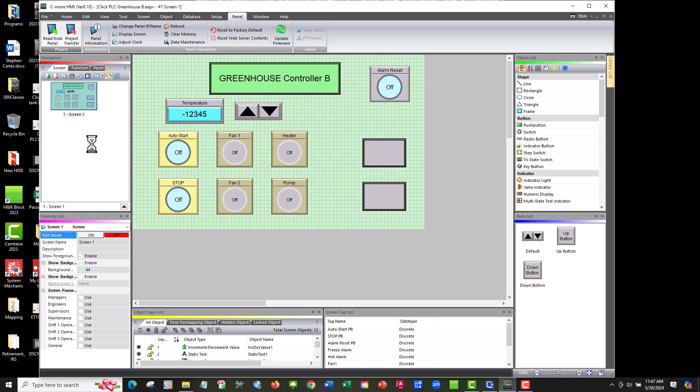Okay, first thing let's do is let's download our greenhouse controller. It's Click PLC Greenhouse B. And we're going to go ahead and project transfer. I've already connected it. And let's transfer it to our machine. Good. And let's close out of that, hide that, and let's go ahead and go to our program.

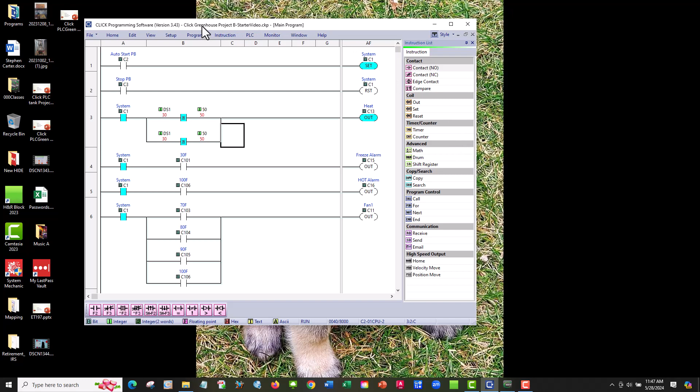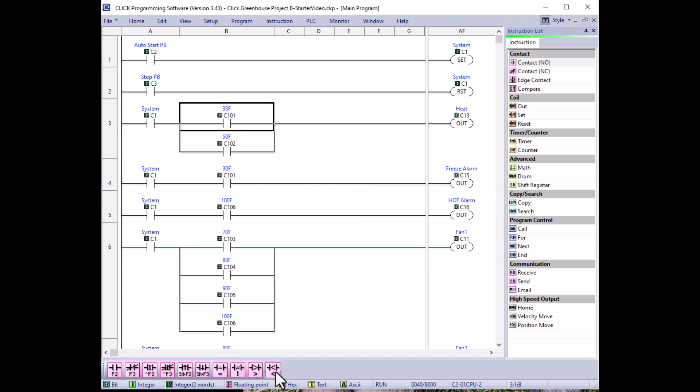And we need to open up the Greenhouse Project B-StarterVideo because I don't want to mangle my programs. Okay, we're going to modify this program. We're going to go ahead and start, and we're going to convert to analog values. So what we're going to do is we'll click on this one, cancel, and we're going to go to less than contact, and our data is going to be DS1, which is going to be from our input, and we have to use DS1 because it's an integer.

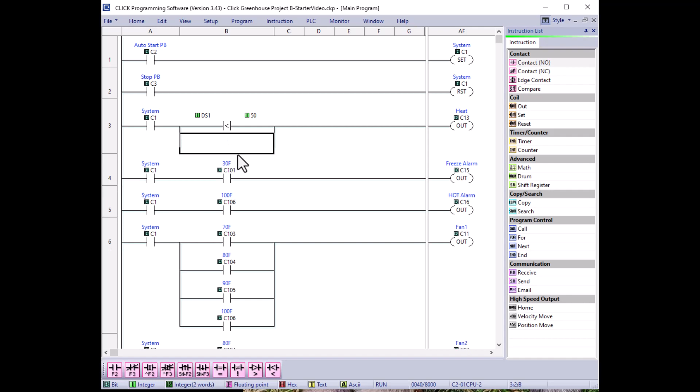And since the heat comes on under 50, we could just go ahead and just use one of these. The fan heat will come on when it's under 50, which also includes 30. So let's go ahead and do that. And let's get rid of this. And let's do a Control Shift and get rid of our connectors. Good. And let's see if we could delete a row just to make it look a little better. Good.

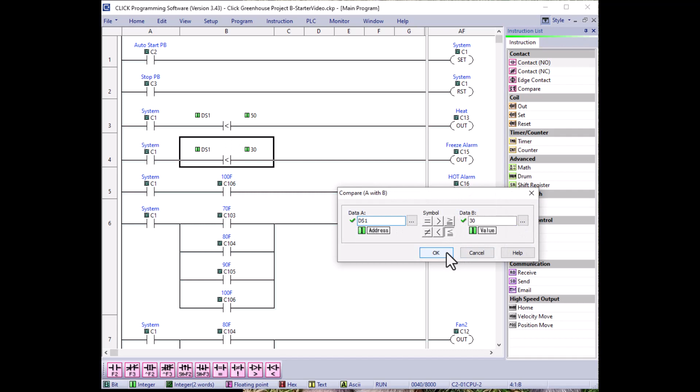All right, so our next one is our freeze alarm is going to be less than 30, so let's go to our less than, and we could find our DS1 here, and I need to go back in. Let's go ahead and do that now if I can. Nickname, nope, we'll fix that later. And we're going to use 30 here. All right, so this should be less than or equal to, what did I do? Grab the wrong one. This is also less than or equal to.

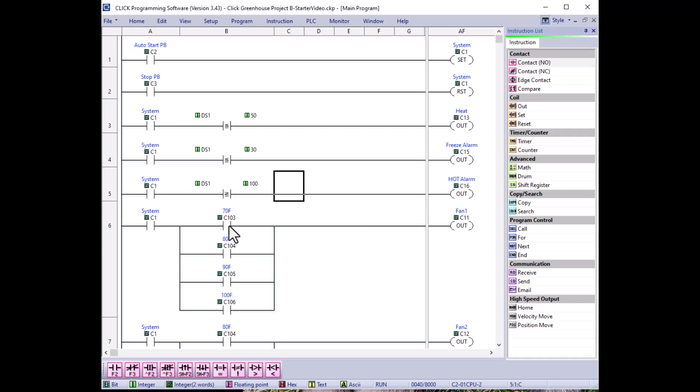Okay, and our 100 degrees is going to be greater than or equal to, also DS1, and data will be 100. Okay, and our fan is going to come on anytime it's greater than 70. So let's just go ahead and do that. Greater than equal DS1, our input temperature, and we're going to do 70.

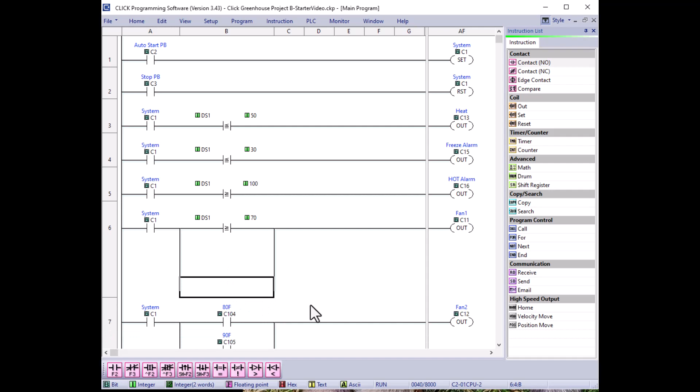Okay. So now we could get rid of our other contacts and Control Shift to erase the, and Control Shift down, Control Shift up, there we go, over, good. And let's go ahead and delete some rows to make it look better. Delete row, delete row, delete row. And our fan 2 looks like it comes on greater than 80. So let's go to greater than or equal to 80. And let's go to DS1.

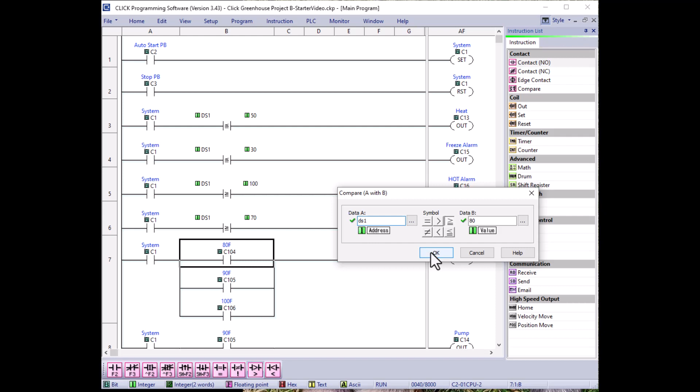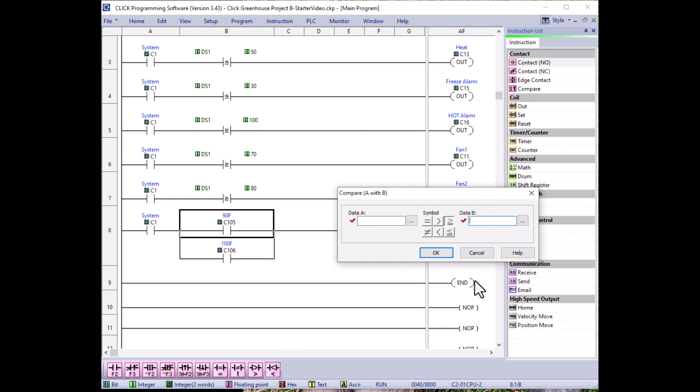Okay. And let's get rid of these two guys. And again, Control Shift up. Oops. Control Shift up, Control Shift down, Control Shift up, up. Let's delete the space, delete row, delete row. Okay, and let's see, our pump comes on, looks like greater than 90. So let's go greater than equal to 90. And let's do DS1.

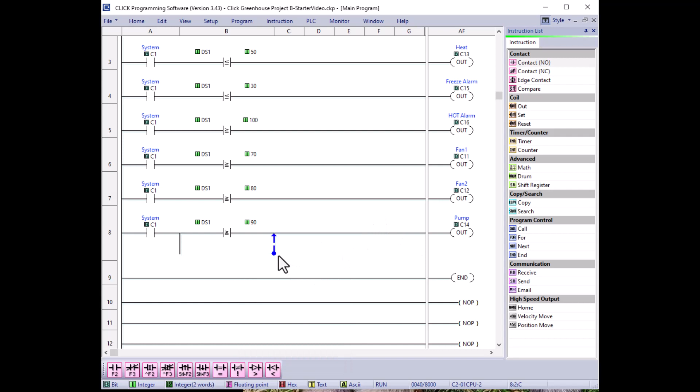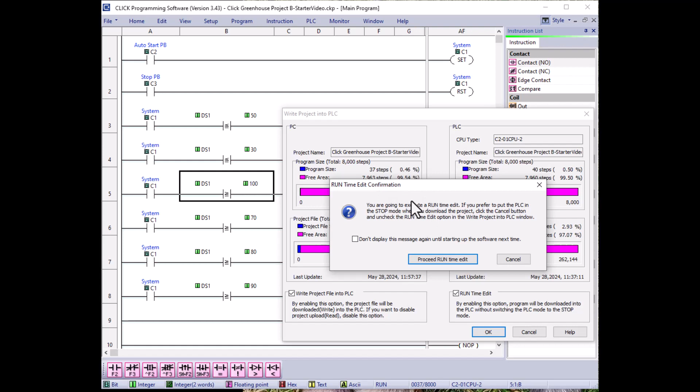And delete that. Whoops, Control Shift up. Whoops. Let's escape out of that. Okay, delete some spaces, delete. Okay, let's save it. And let's go ahead and test it here before we get too far along. Okay, so let's see, right now we have 30. And we have a problem with our freeze alarm. Oh no, we don't. Our freeze alarm should be on.

Okay, let's go ahead and clear everything here and restart everything. So now we have our heater should be on, and it is. Our freeze alarm should be on because I have it set at 30. And our hot alarm should not be on, and it is not.

And okay, so let's go up to 50. So I'm going to go ahead and type that in. We'll come back and do this here later. So I got 50 degrees in here, and we're good. Alrighty, so we got 50. Okay, so first thing we're going to do is go to 70. 70, and we could also do the increment button. Alright, so we're at 70, and we have fan 1.

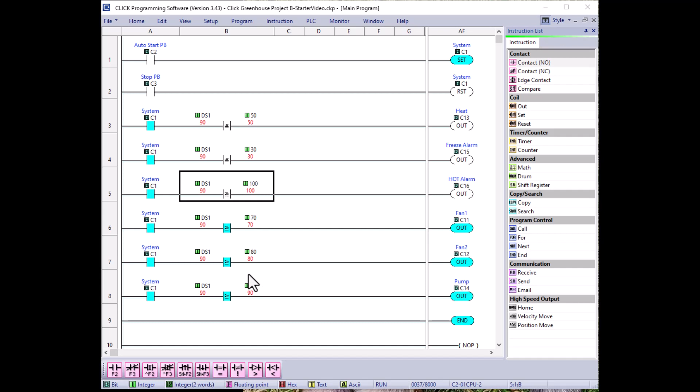So let's go to 80. And we should have fan 1 and 2 on. Good. And let's go to 90. And we should have the pump on. Good. So let's go to 100 and see if we get our alarm. Oops, 700. So we're definitely past it, but we do have our hot alarm. Good.

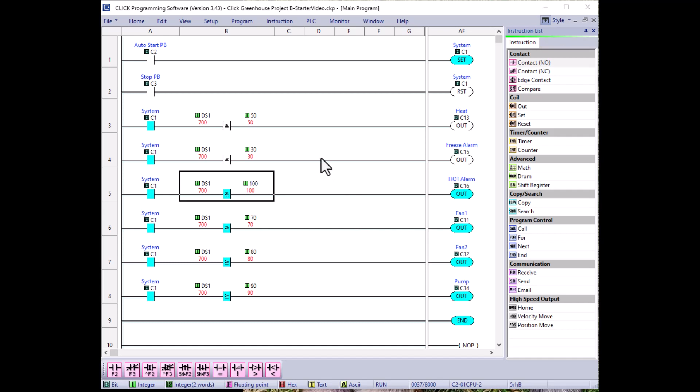First thing let's do is let's latch our alarm. So what I want to do is I'm going to go ahead and copy these and paste them down here so I could steal the parts of them. And hot alarm. Okay, so what I want to do is I'm going to clean these up. So we're going to go ahead and make a temporary, let's see if we can find a temporary one here to do. Let's do C17, and we'll come back and do that. So we're going to make him a temporary alarm, and this guy we're going to make C18.

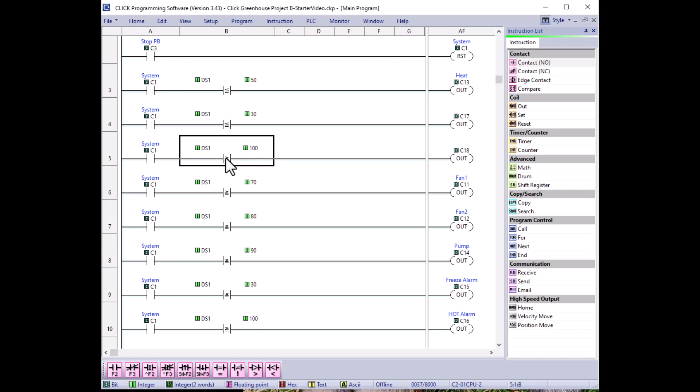Okay, and those are going to be temporary alarms. So let's go ahead and latch that. So we're going to insert a row after cursor, and we're going to put an open contact, and we're going to use, let's see, C18 on this one. And we're going to shift up, or excuse me, control up.

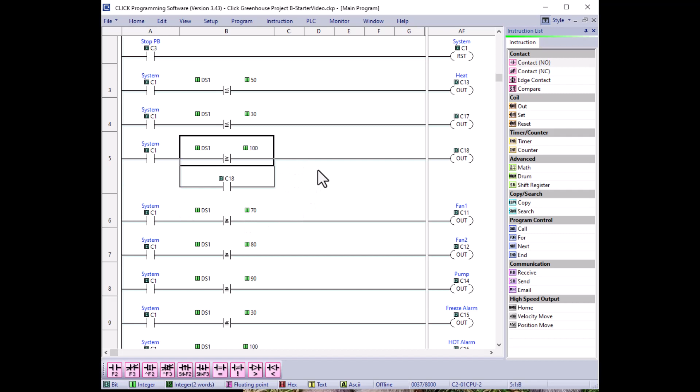All right. And let's go ahead and add what's our reset button? It should be, I think, C4. So let's go ahead and put in this and see if we can find it in our alarm reset. There we go. And we're going to make that one normally closed. So if we do our alarm reset, we should unseal that. Good.

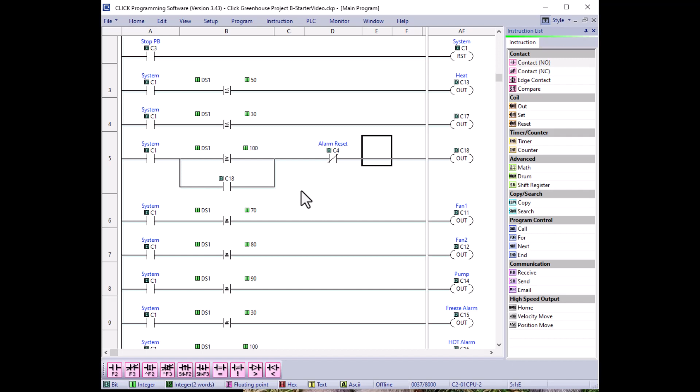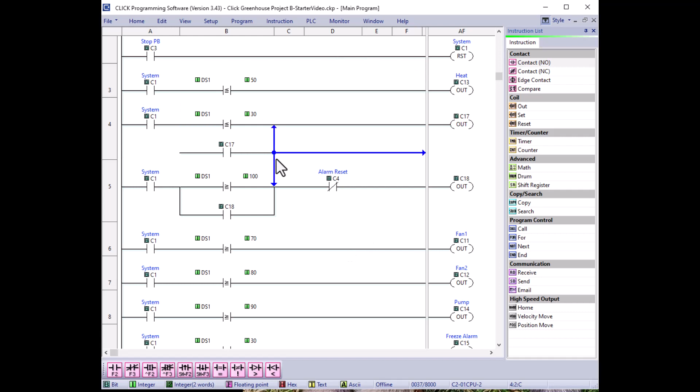And while we're here, let's go ahead and insert a row after cursor, and we're going to latch that with a C18. C17, sorry. Okay. Control up, whoops. Control up. Control up. And let's see if we can copy this guy and slide him in there.

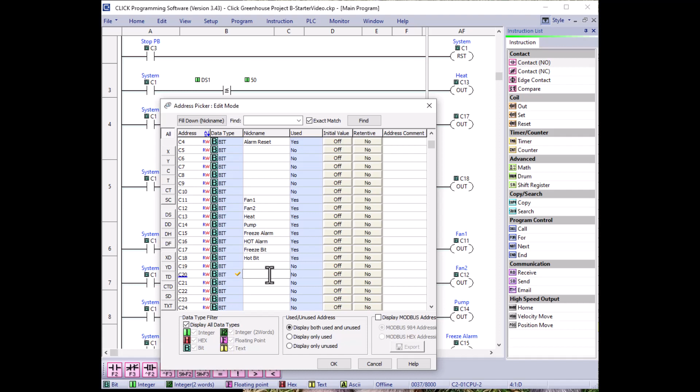Perfect. So now let's go to Program, Address Picker, and let's put some names. C17 will be freeze bit, and C18 will be a hot bit. Okay, let's go to DS1. Yep, whoops, DS1. I'm going to make him temperature, temp. Good. And alarm reset, freeze bit, hot, freeze bit. Good, good, good. Okay.

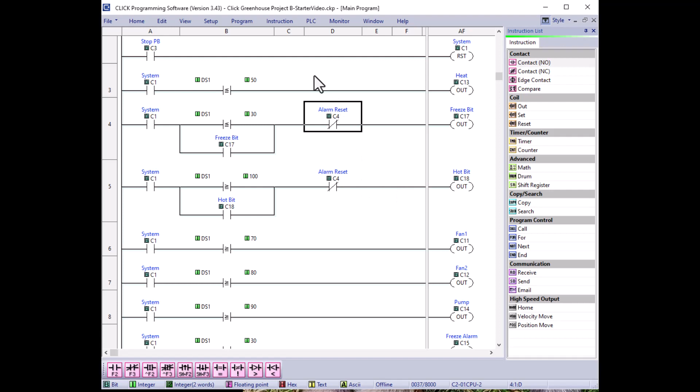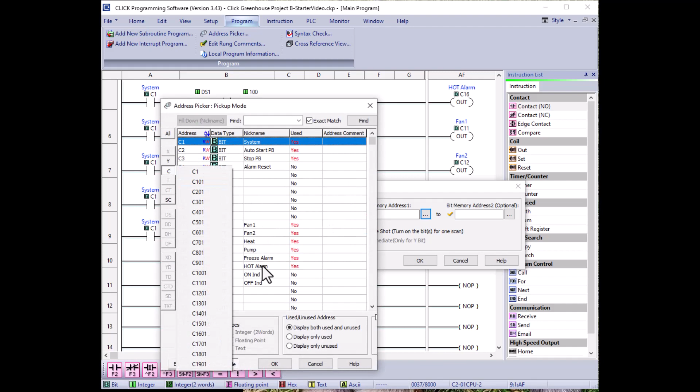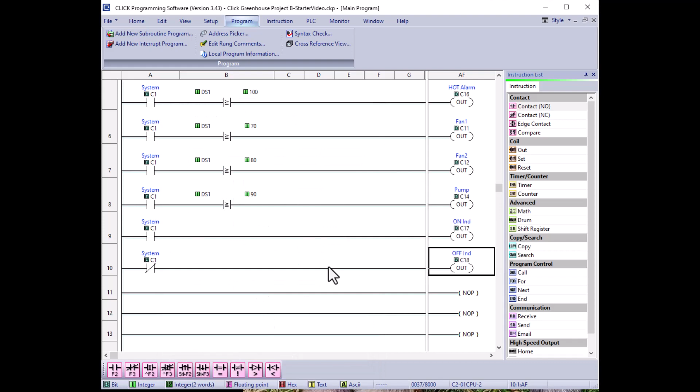Okay, let's modify the program for our on and off indicator. So let's go ahead and start with C1, which is our system. If he is on, I want to turn on our on indicator, C17, and if he is off, C1, we'll use a closed contact, and we're going to use our off indicator, C18. Good.

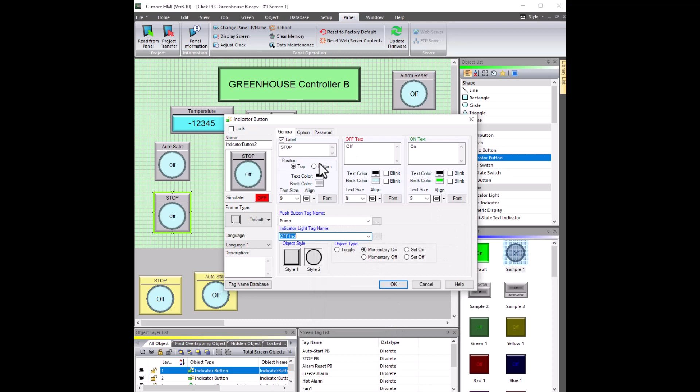Stop push button. And this guy is going to be an off indicator. OFF. And he should be a C18. Momentary. Good. So let's get rid of these two. And I am going to save this as modified, _mod. Good. That part is done.

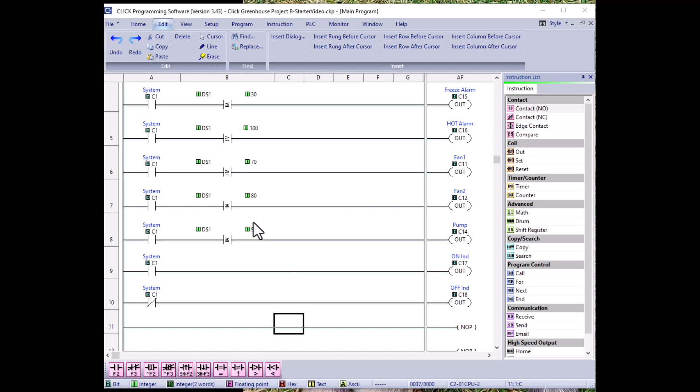Okay, let's do our freeze alarm latch and timer. So let's go ahead. I'm going to copy and paste this. So let's go down a few of them because I want to put a timer in there. Come on. Alrighty, so we got our freeze alarm. So let's make this guy a freeze bit. Yeah, we'll make that C19.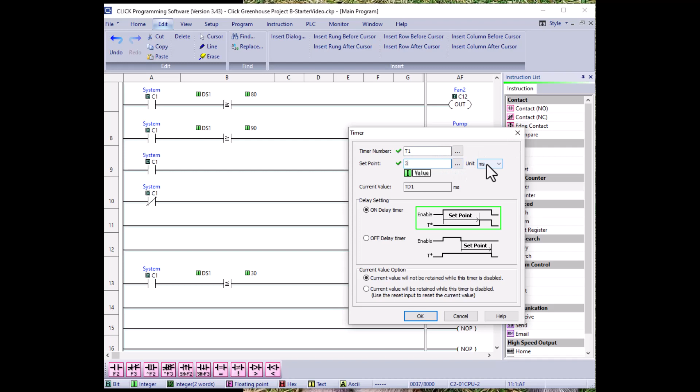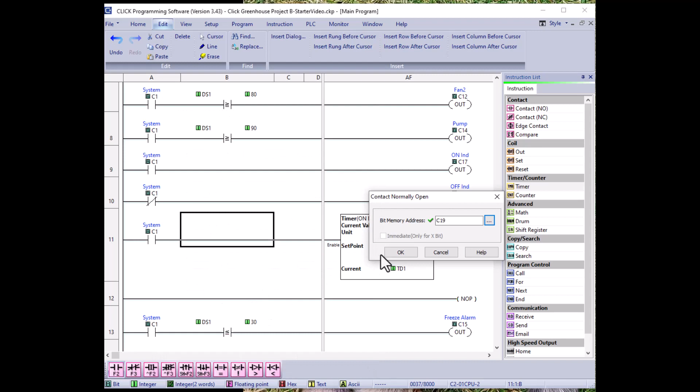Alrighty, so when our freeze bit goes, what I'm going to do is we're going to make a timer. And I'm going to call that T1, and we're going to have 5 seconds or 3 seconds. Change this to seconds. Okay, and I'm going to have our system coil C1, and I'm going to have my freeze bit. So let's see if we can find my freeze bit. Freeze bit. Good, so there's our timer.

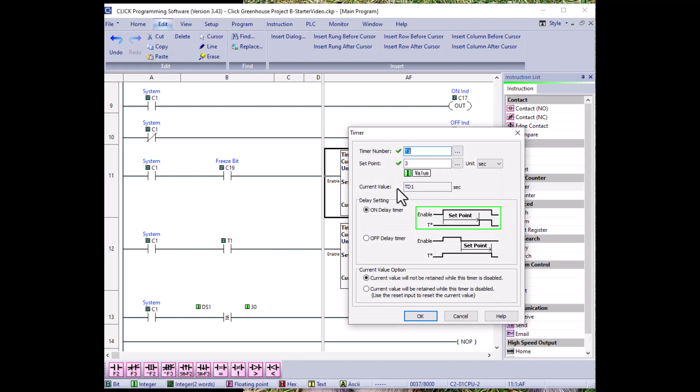And I'm going to go ahead and add another timer, T2. What I'm going to do is I have an on timer and off timer, and that's what we need to do in order to get it to flash. Okay, and this guy, I'm going to have our system coil, and I'm going to have T1. Okay, and with our T2 bit, I'm going to click this guy, and it's going to give us a reset. So we're going to add another coil, T2, which is going to reset our timer. So I'm going to do a control up, and I'm going to leave that for now.

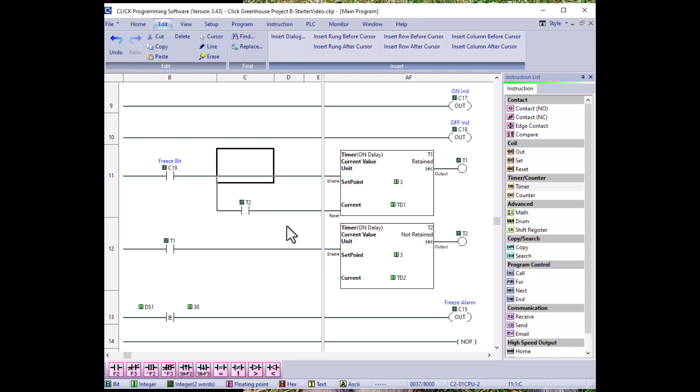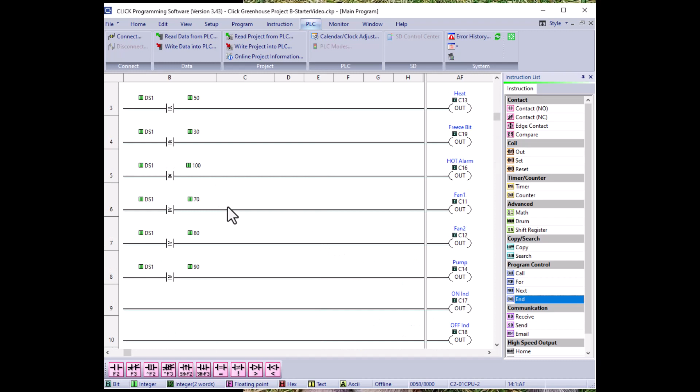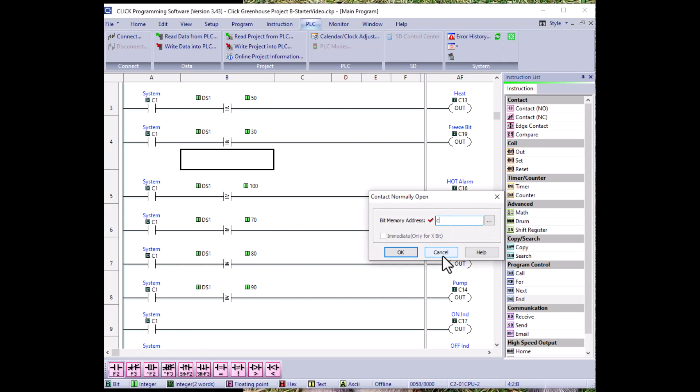Okay, let's finish this up here. So we're going to make this T1 an open contact. So we're going to use our timer bit here. And of course we need to add another end, which I erased. And then we're going to come up here, and what we want to do is latch our freeze bit. So let's go ahead and latch this signal. So we're going to insert a row after cursor, and we're going to put our C19 freeze bit here, which is going to latch that sealing circuit.

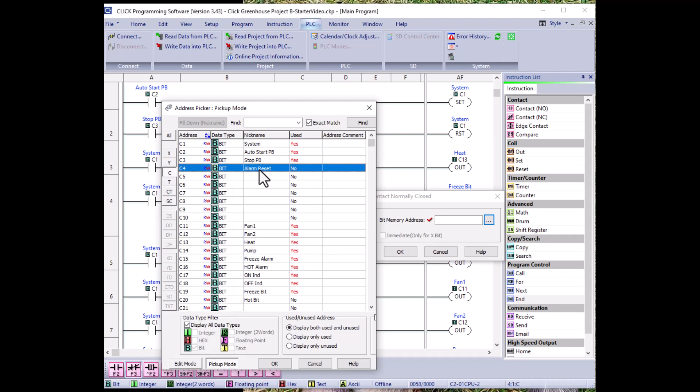So we're going to control up, and we're going to put our alarm reset here with a normally closed. So let's see if we have alarm reset here anywhere under C, and we do. Good. Okay, let's test our alarm. So we're going to write our project to the PLC.

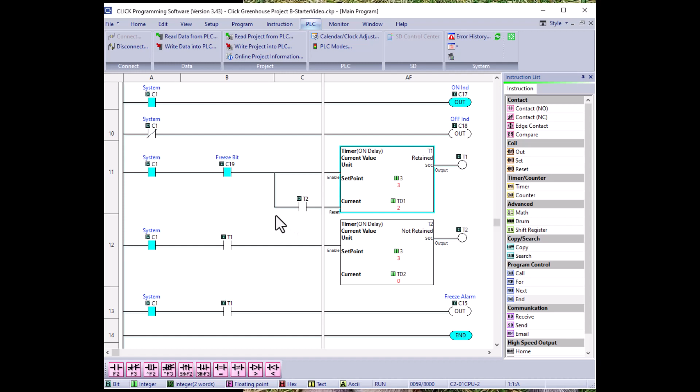And I've already got the temperature set for 30, so we should get a freeze alarm. And let's do our control, and we have 3 seconds on, 3 seconds off. Perfect. Okay, let's add our hot alarm.

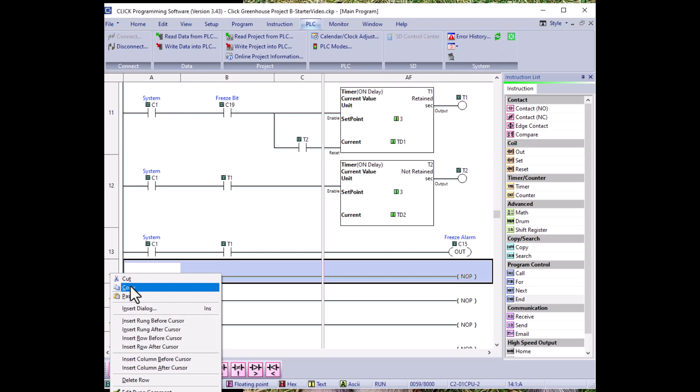So let's go ahead and insert several rungs to push our end down so we don't lose it. Okay, and we're going to do a trick here. I am going to copy, let's see if I do a control, nope, copy and shift, nope, we can only do one at a time, copy, so I'm just going to go ahead and steal our timers from our other one, and I'm going to steal our alarm.

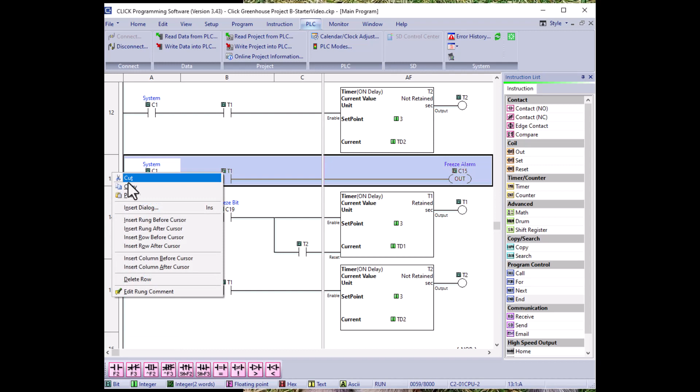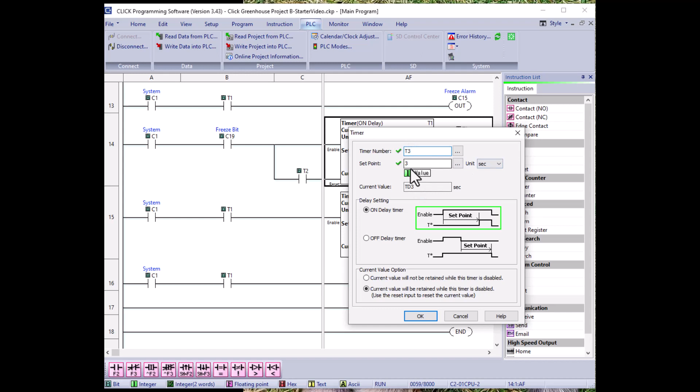The danger with this is we have a chance to mess it up, so I'm going to change this to T3, and I think we got a 1 second flash. Okay, I'm going to make this one T4, 1 second flash. I'm going to make this T4 as a reset. We're going to make this our hot bit.

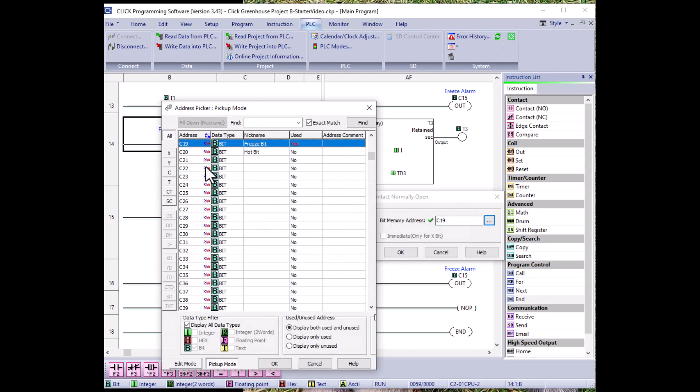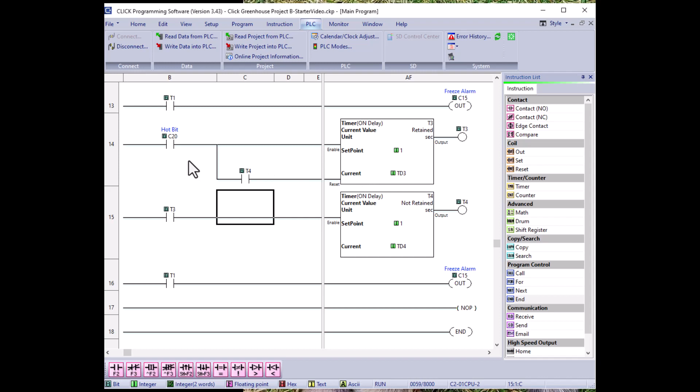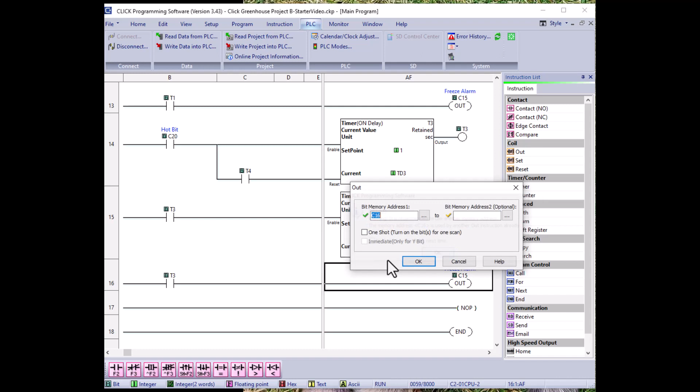Let's move it over, make sure I didn't miss anything. It says hot bit, and this is going to be T3. Good, T3, hot bit. This is going to be T3, and this is going to be a hot alarm. Oops, wait a minute, somewhere I've got a hot alarm. I did not change this to our hot bit, so we need to do that. That's why it's giving me an error. Hot bit.

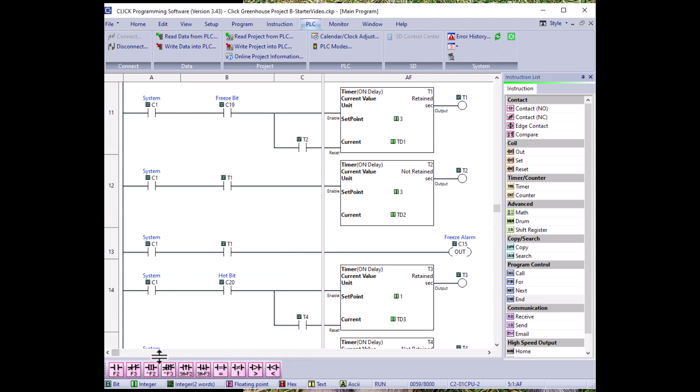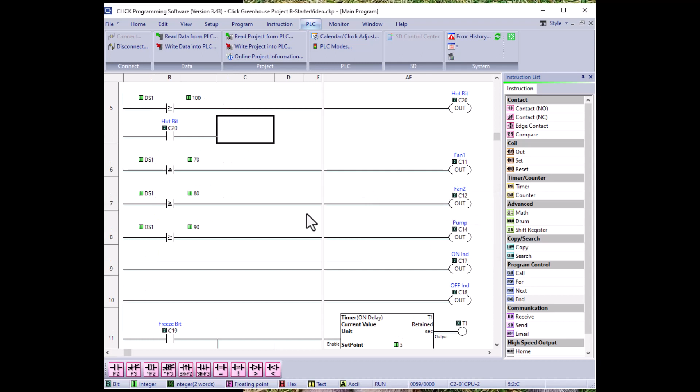Okay, so let's latch our hot bit. Oops. Hot bit. There he is. Right click, insert row after. Let's go ahead and put in a C bit of 20. Hot bit. And control up. Control up. Good.

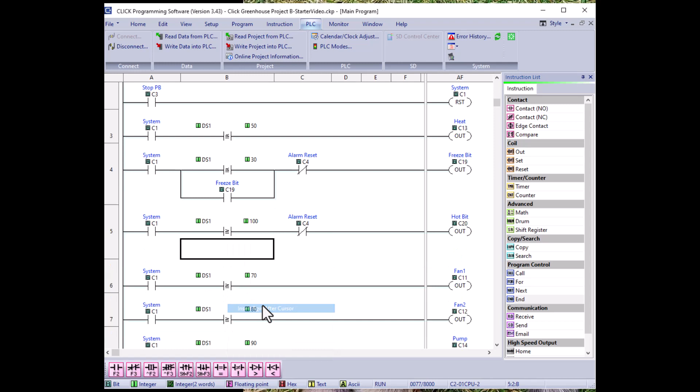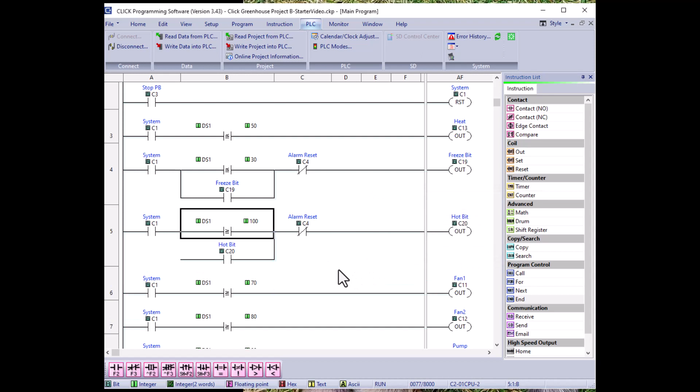Okay, I found an issue here. We need to reset our hot bit. So I am going to insert a row after cursor. And I'm going to put an open, and we're going to use our hot bit, which is C20. And we're going to do a control up and a control up, and I'm going to copy this, and I think that we need to go ahead and dump it. Oops. Let's go ahead and open this up a little more. Let's close all of this. Let's see if we can delete that.

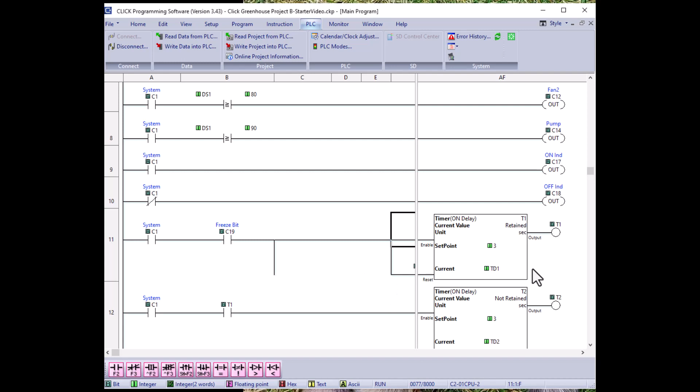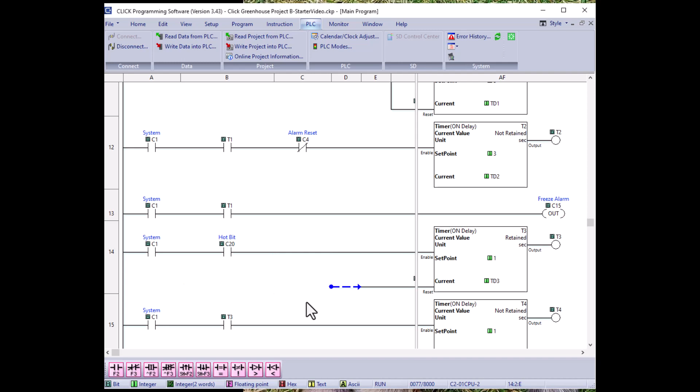Okay, and let's go ahead and put in a, nope, let's go up and grab our alarm reset, and let's put it here in our timer, and our second timer, make sure that we reset those back to 0. Alright, so let's copy and paste that far back over here. Erase that. Control Shift up. Control up. Insert our reset bit.

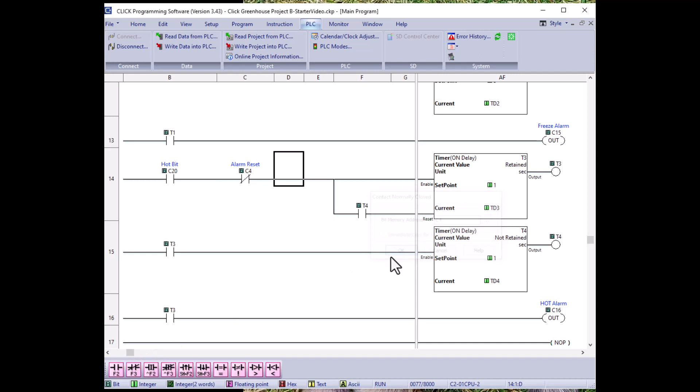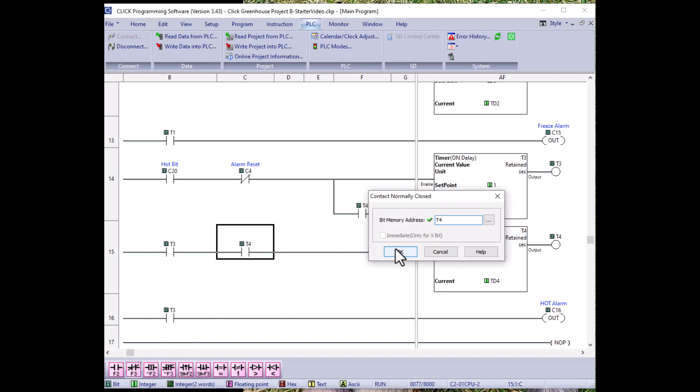Alarm reset. And that should be normally closed. There we go. And let's go ahead and put one in here. Good. Okay, let's clarify what I did here. I added an alarm reset in our freeze bit and our hot bit in order to clear those. And I added an alarm reset into the input of our timer. And I put alarm reset in parallel with our timer to clear that.

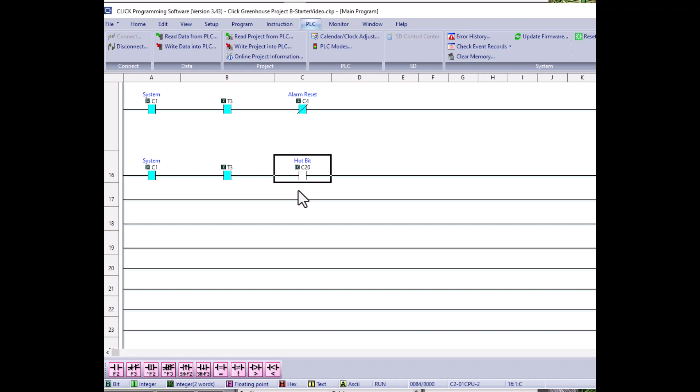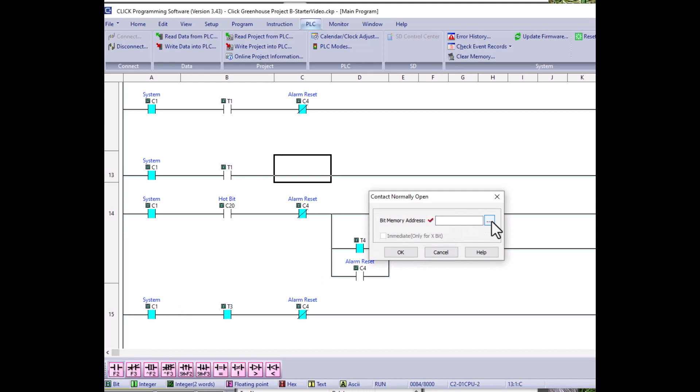And I put alarm reset into our main timer, alarm reset into the secondary timer, and I put alarm reset in parallel with our other timer in order to reset that. And output, and I put in a hot bit in line with our hot alarm in order to prevent it from going on when the timer's latched. Actually, I need to do the same thing with the freeze alarm, even though that's a 3-second. Let's go ahead and do that. I'm going to put in a freeze bit there. It might be a little overkill, but that'll prevent that one from being latched open. Good.

Okay, let's go ahead and try the lab here, and we're going to start. And we're going to have the heater on and get a freeze alarm. So if we go up by 1 degree, reset the alarm, it should be off. Good. So let's go to 50. And our heater should still be on. Let's go to 70. And our fan should be on, our heater should be off. Good. So let's go to 80.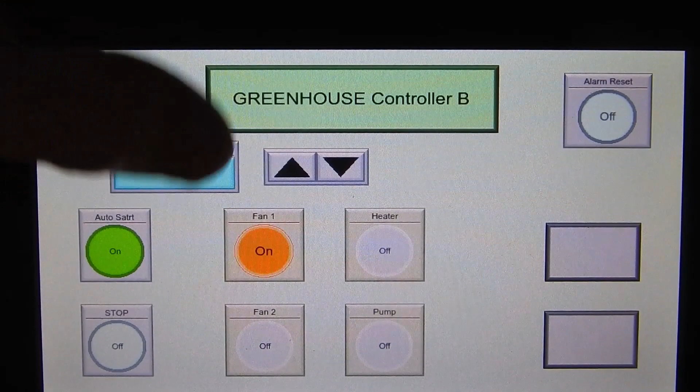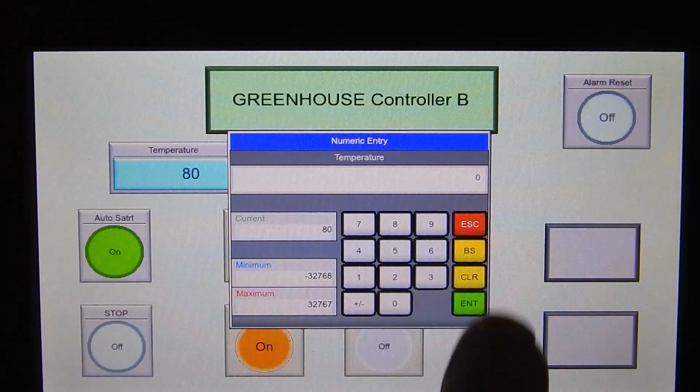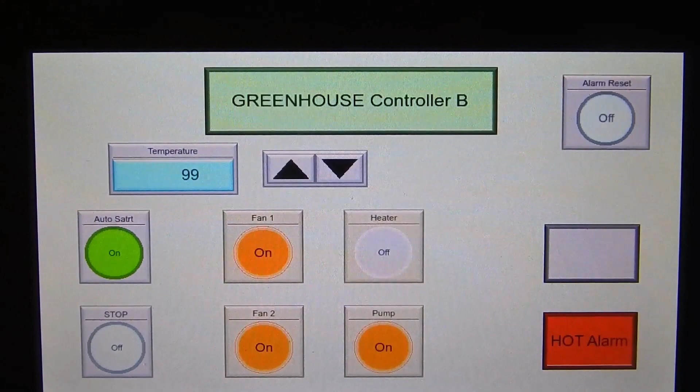And we have both fans on, so let's go to 90. And we should have our 2 fans and the pump. Let's go to 100. We should have the same conditions, but we should get a hot alarm. And we do, and it's flashing, so let's drop down by 1 degree, reset the alarm, and it's off. Good.